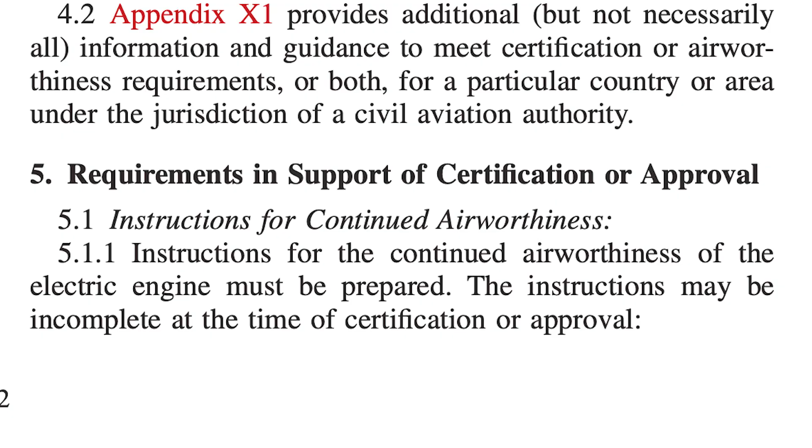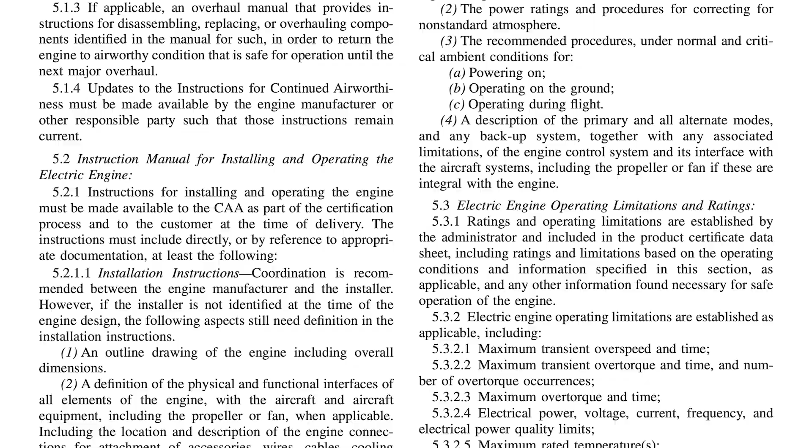In this video, we will discuss Section 5 of the ASTM F3338, which covers the requirements in support of certification or approval. There are 26 different subsections covering everything from materials, operating limits, controls, vibration, stress, cooling, propeller tests, and more. As part of the certification requirements, the administrator must establish ratings and operating limitations.

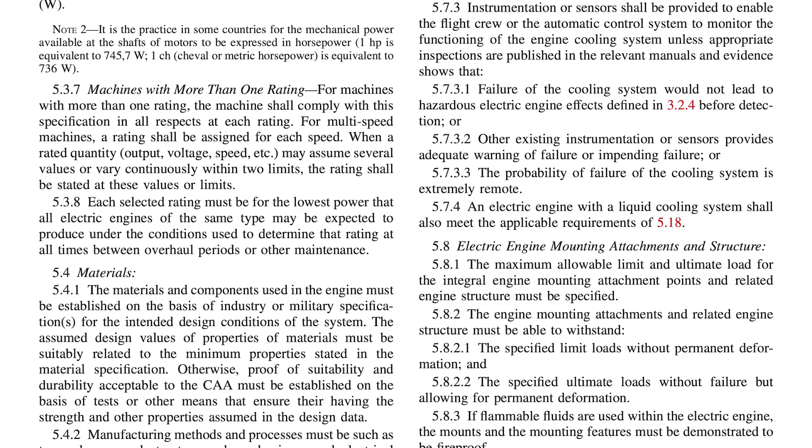This information and any additional information necessary for safe operation must be included in the product certificate datasheet. These limitations are found in Section 5.3.2. Some examples are maximum over torque and time, electrical power, voltage, current, maximum rated temperature, maximum and minimum continuous temperature, and vibration limits. Ratings found in Section 5.3.3 are based on the intended duty cycle and are defined by power,

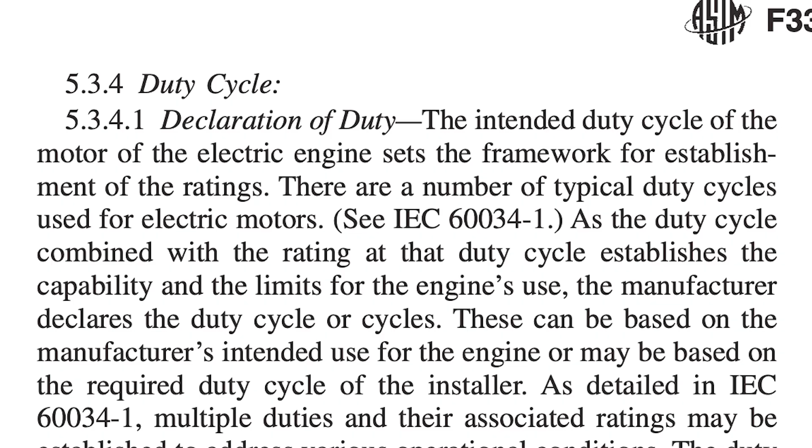torque, speed, and time. There are a number of typical duty cycles used for electric motors. These can be found in IEC 60034-1. This IEC standard details multiple duties and their associated ratings for various operating conditions. The duty cycle can be described numerically using a time sequence graph or by selecting one of the typical duty types found in IEC

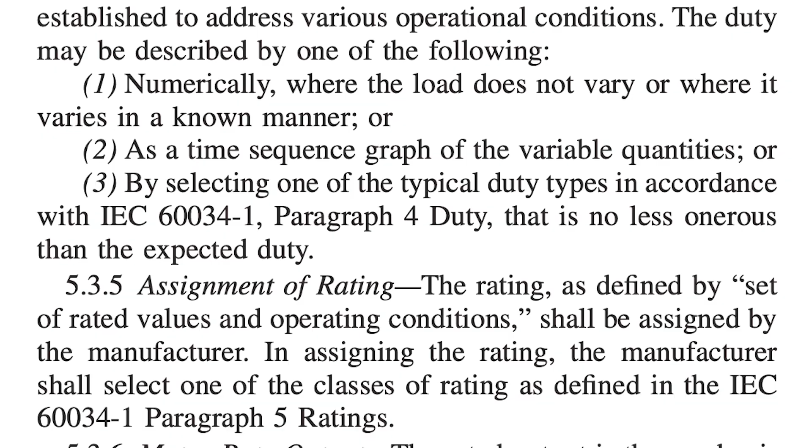60034-1. An example of a rating is the motor rated output, which is the mechanical power available at the shaft and is expressed in watts. In some countries, mechanical power is expressed in horsepower. Other requirements for the design of the electric engine include overspeed of the electric engine rotor.

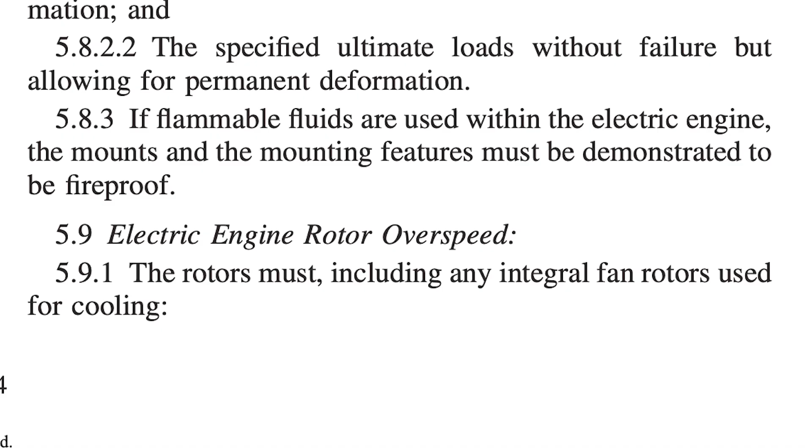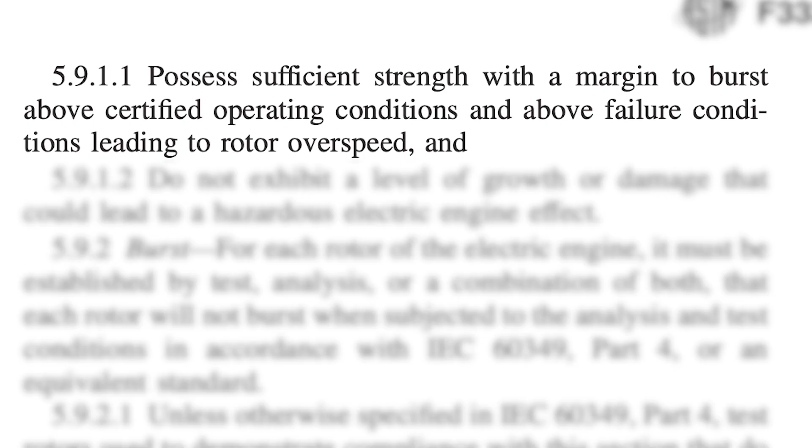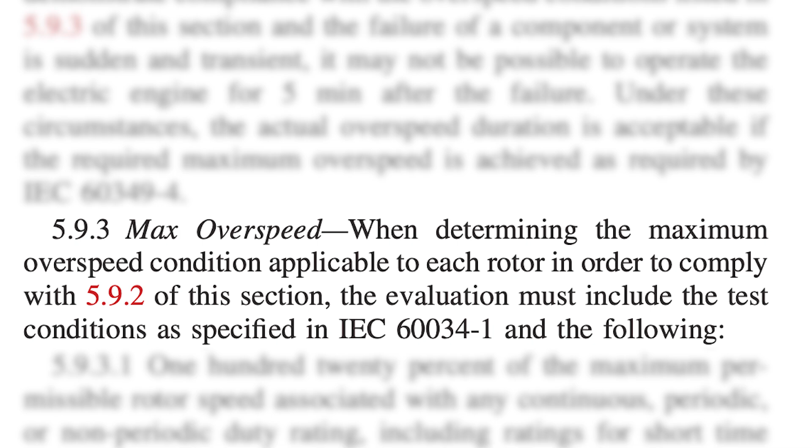The rotor must possess sufficient strength with a margin to burst above certified operational conditions and above failure conditions leading to rotor overspeed, meaning the rotor should not burst when subject to the analysis and test conditions in accordance with IEC 60349, Part 4. In addition, they should not exhibit a level of growth or damage that could lead to a hazardous electric engine effect. The max overspeed for rotors must be tested by running at multiple conditions, including those specified by IEC 60034-1 and in ASTM F3338, Section 5.9.3.

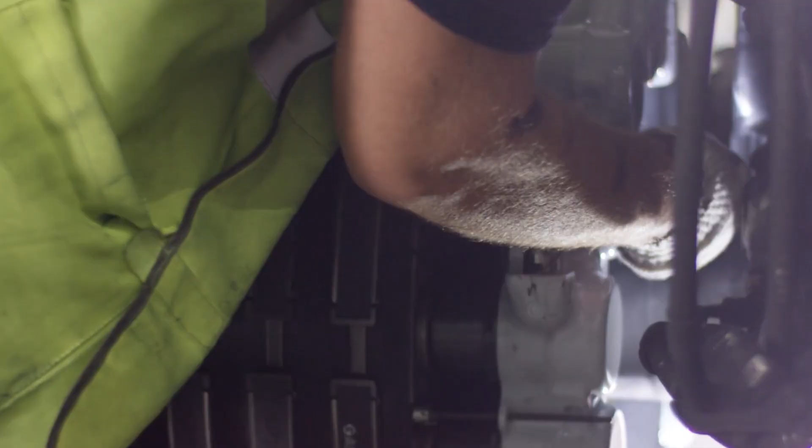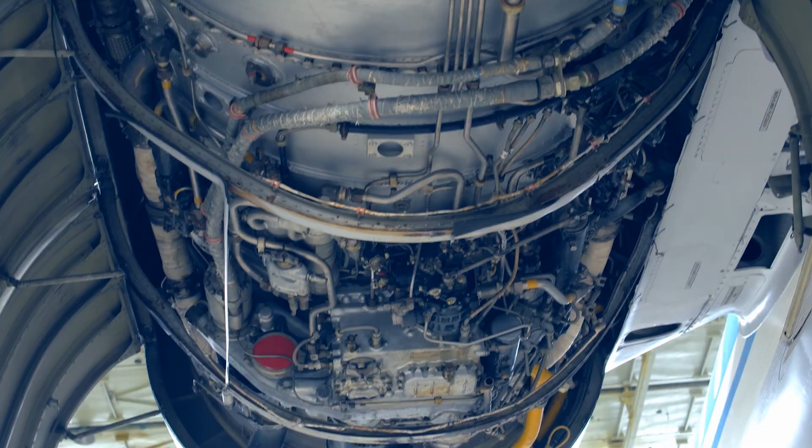The design of electric motors includes how to handle life-limited and critical parts. Critical parts are those parts where their failure could cause a hazardous effect, but the mechanisms are limited to high cycle fatigue or overload. As such, the part is not required to be removed by a certain number of flight cycles or engine operating hours. A propeller is an example of a critical part.

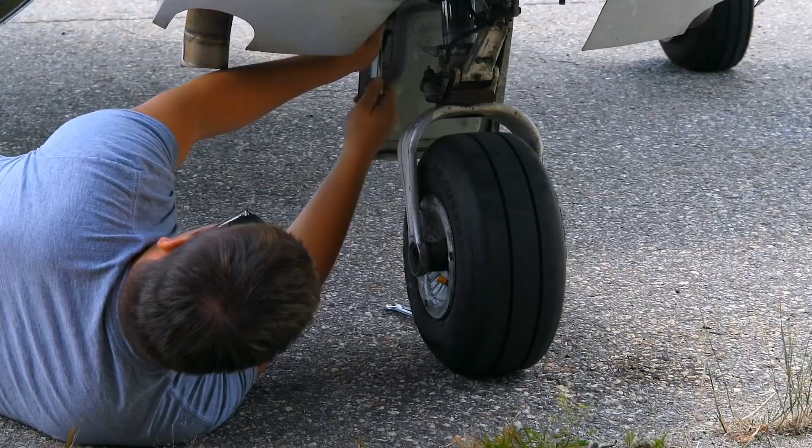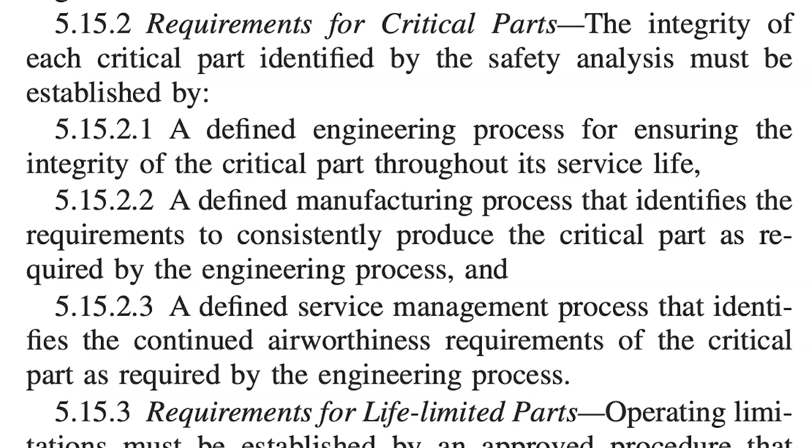Whereas life-limited critical parts have low cycle fatigue, creep, or other mechanisms and must be removed after accumulating a certain number of flight cycles or engine operating hours. These parts may be forced to be replaced during scheduled overhaul, such as bearings. Section 5.15.2 lays out the identification process for critical parts, and Section 5.15.3 for life-limited parts through defined processes or plans for engineering, manufacturing, and service management.

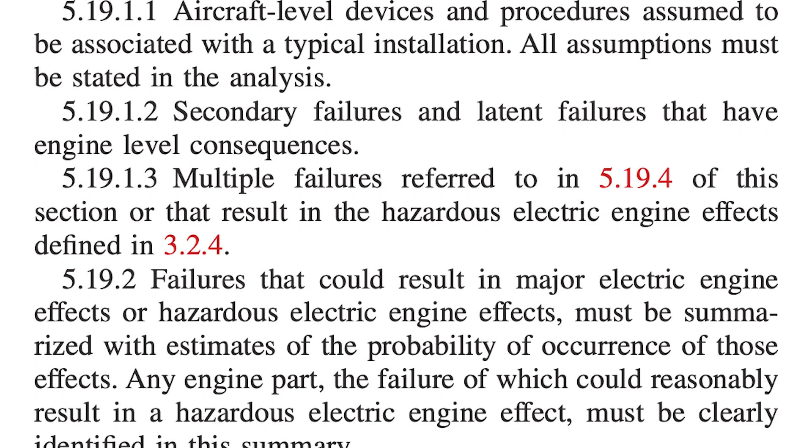Section 5.19 covers safety analysis. This process means the engine design and control system is analyzed to assess the likely consequences of all failures that can reasonably be expected to occur. This section includes references to other sections of the standard, such as 3.2.4, 5.15, and 5.19.4. The final requirement that this video discusses is Section 5.20, ingestion.

For electric engines, the focus is on cooling blockage and structural damage. Cooling failures are defined as a blockage of the cooling passages due to bird strike, hail, or ice contamination. Any structural damage must not result in any hazardous electric engine effects.